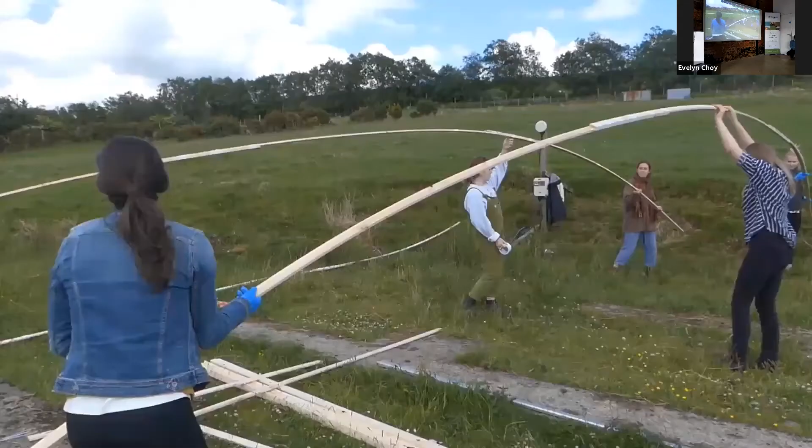Progress in construction is impeded by its insularity. Working with people who are different to us helps develop co-design skills and to communicate beyond the bubble of architecture.

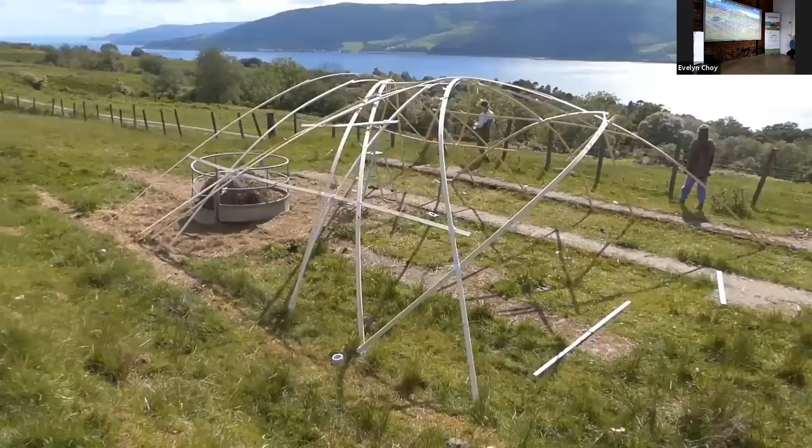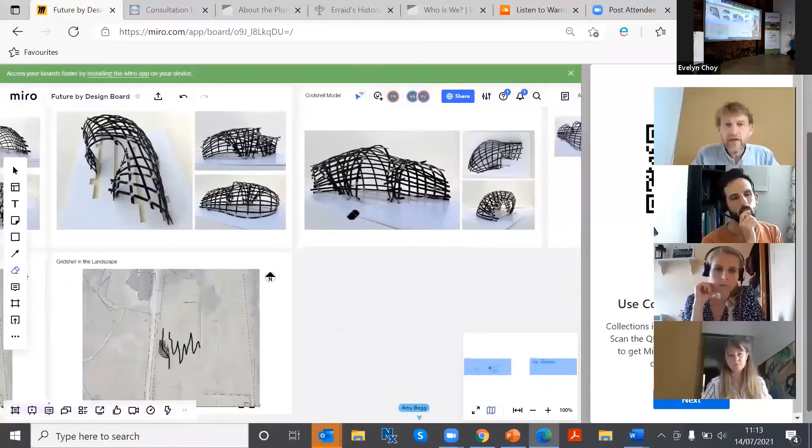So we brought together a diverse group of young creatives from 17 disciplines in 2 countries. In Scotland, students of architecture, product design engineering, jewellery, sculpture, photography, film and botany worked with early career architects, landscape architects and engineers.

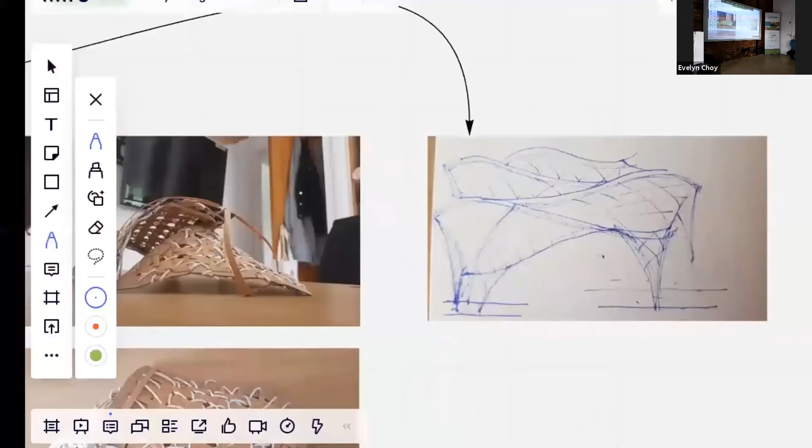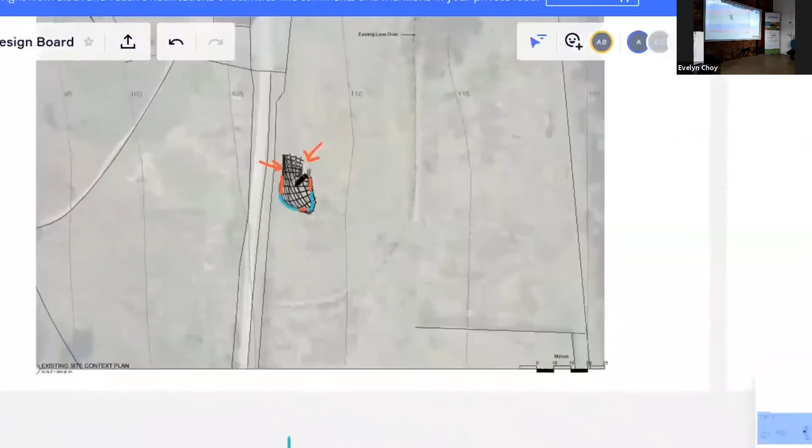Connecting the creativities of the hand and the brain proved a powerful design tool. I'm not from an architectural or an engineering background, I'm actually a jeweler and a silversmith. The move from object and handheld scale to the scale of somewhere you would step inside is a big jump, but the kind of interaction between a person and an object works in the same way, I guess.

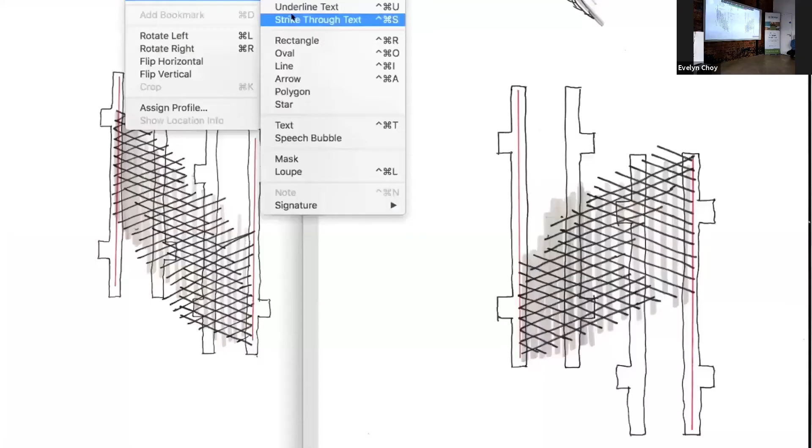The fundamental thing is, how do you make something work? The great joy of a project like this is its fundamental structural thinking. I think this idea of using a gridshell introduces a whole really interesting dynamic, because you can create structures that are unusual but at the same time will stand.

I actually had sheets of this very thin plywood, so I cut that into strips, and I was trying to look at the forms.

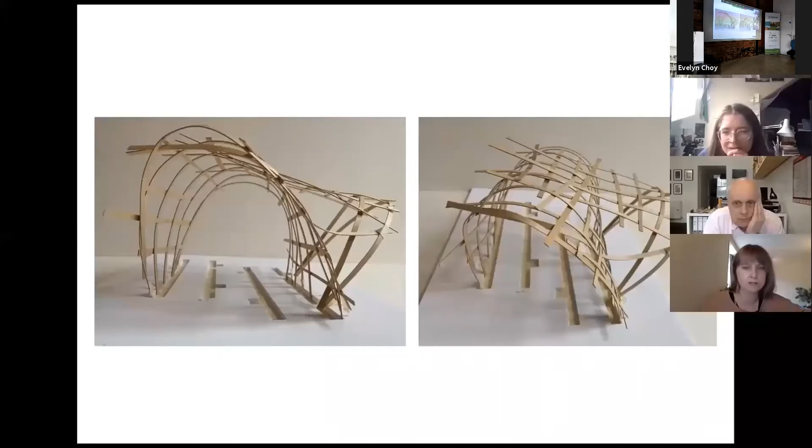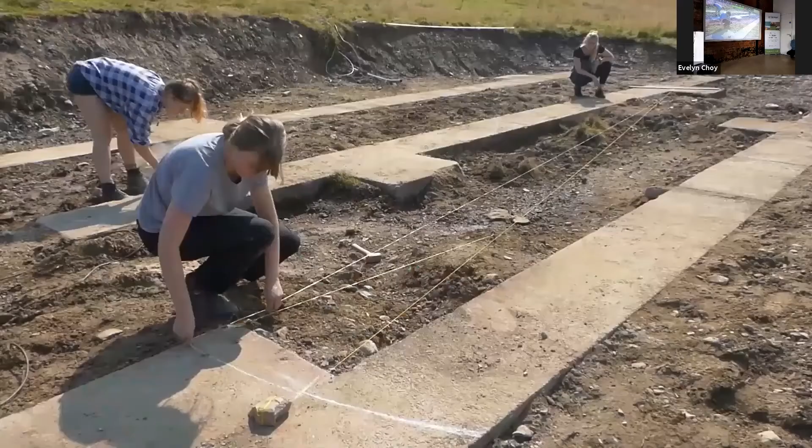We chose a brownfield site, reusing foundations from a previous building that stored about 14 tonnes of carbon. The challenge was to design a new structure within the constraints of 4 lines of concrete. The response: a 3D curvilinear lattice, the most different form imaginable. This avoided new concrete, a huge carbon source and the second most used substance by man after water.

8% of global carbon emissions come from cement, more than from aviation. If concrete was a country, it would be the 3rd biggest carbon emitter after China and the USA.

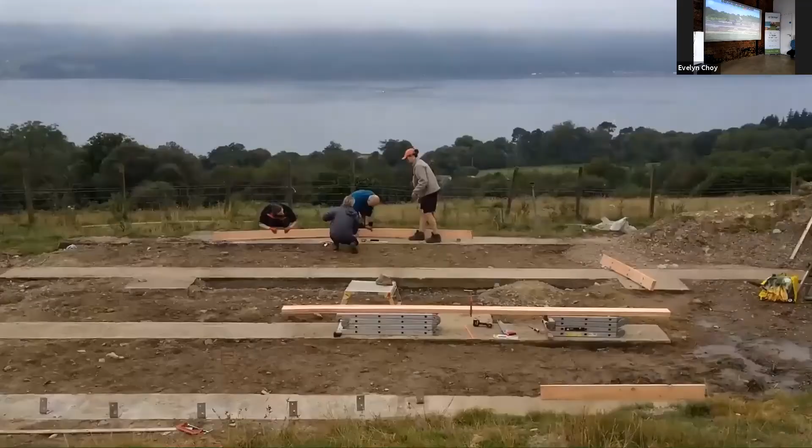As transport transitions away from petrol and electricity from coal, so construction will transition away from cement. Along with biocomposite alternatives, future designers will need the skill to reuse the carbon held in existing structures. One set of foundations may support many buildings over their lifetime.

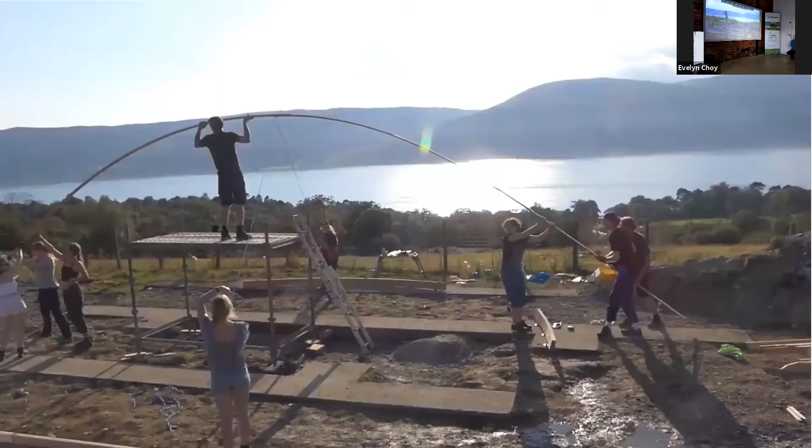Exploring low-carbon, non-toxic materials with transformative growth potential brought us to timber and mycelium. Larch was joined into 16-metre lengths, fixed with stainless steel cable ties and bolts.

Timber technology is really firing forward. You can make things that we couldn't do with bits of trees before, and that's completely fascinating.

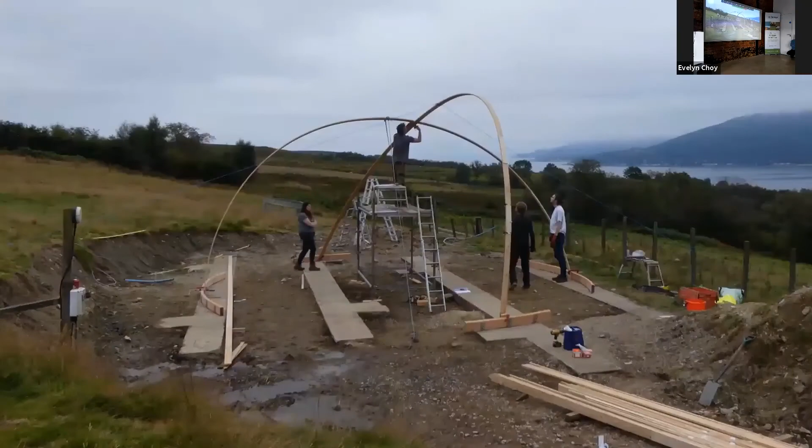Pushed to the limit of its strength and bendability, it wasn't clear whether the structure would work until the grid shell was actually constructed. If the timbers hadn't bent sufficiently, the group would have adapted the design on site to reflect the limitations of the material.

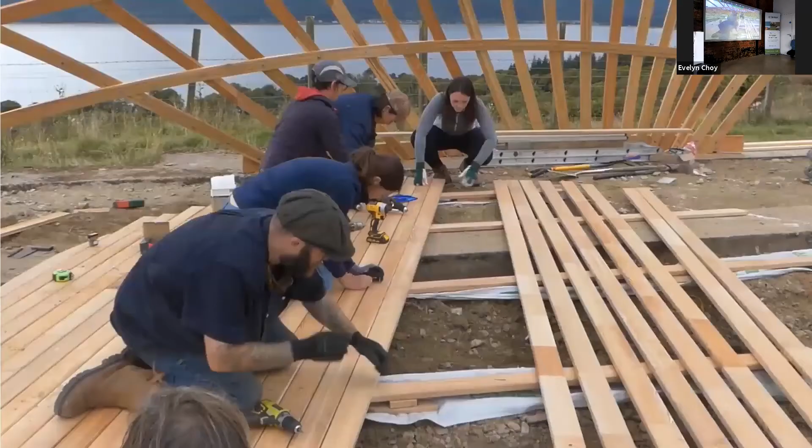This was an intentional design risk. Construction is dominated by accepted norms and low-risk approaches adopted for financial reasons, but which impede innovation and market development. To transform construction, we need to change our attitude to change. We need designers that will push materials and lead teams beyond their comfort zones.

For this project, it was important that we were daring. Not to have risked failure would have guaranteed that we didn't succeed.

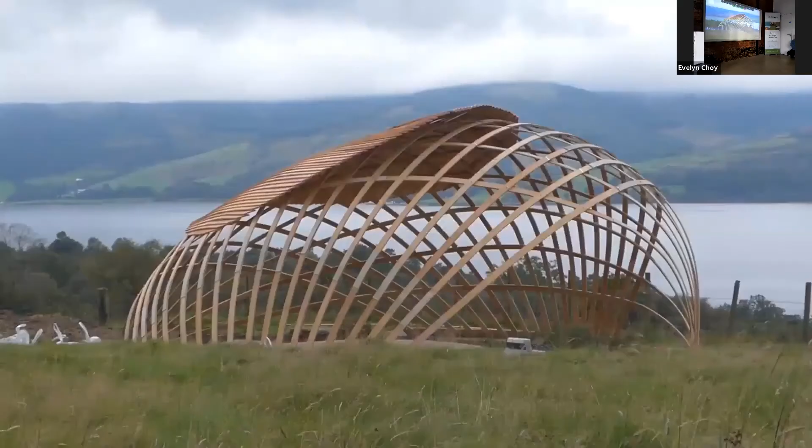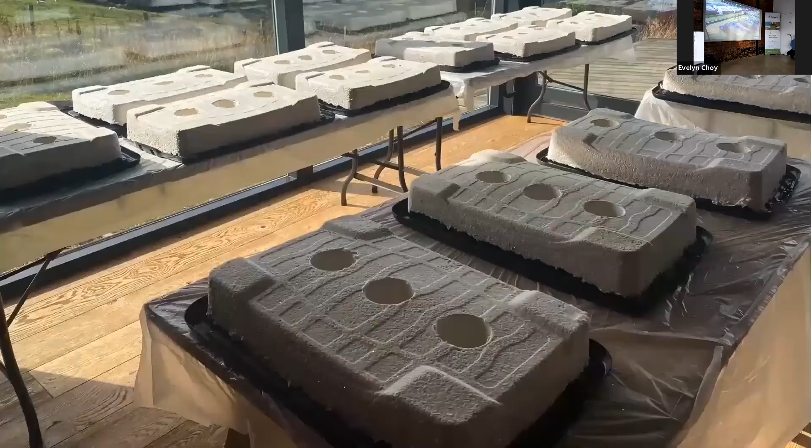The furniture created from mycelium and agro-waste in 5 days shows how we can grow our future buildings, displacing plastic and metal products. The group fused landscape and building architecture into one process of environmental design.

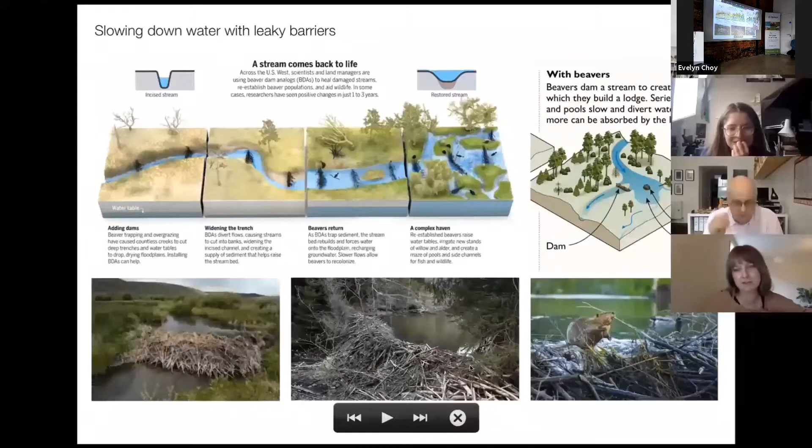I was interested in how these sorts of interventions, like beavers introduce, help change a landscape and maybe slow down water. We discovered that the post-farming landscape of the local area was part of the original Scottish rainforest, a rare temperate rainforest dominated by oak and hazel, rich in ferns, mosses and lichens.

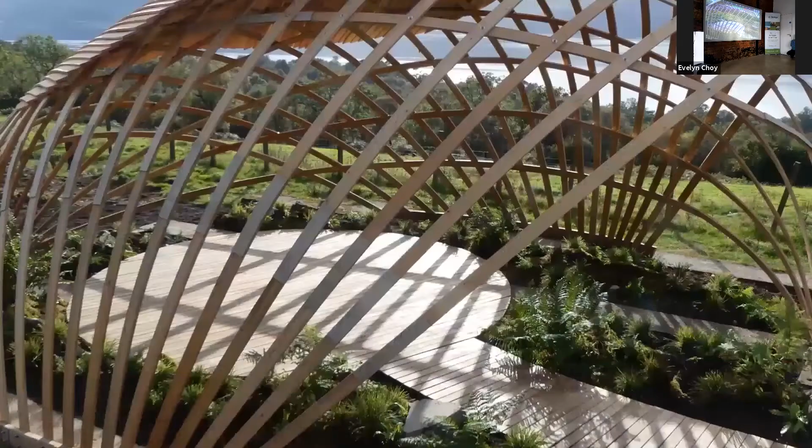Using a regenerative approach, the timber grid shell mimics rainforest conditions of shade and shelter, enabling pioneer rainforest plants to develop as an educational resource and a nursery to spread the habitat further afield.

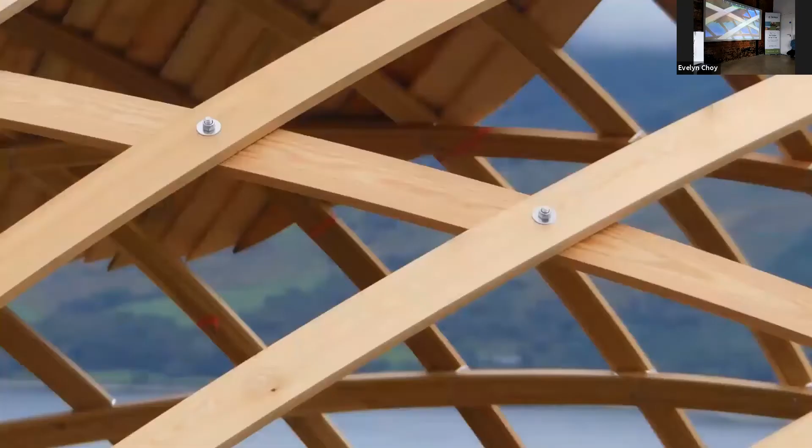By creating conditions that are good for forest plants, the design also makes a place for humans to thrive. Mimicking a forest clearing, the space slows people down, brings attention in close, moderates temperature, creates a more intimate acoustic, all reducing environmental stresses.

I quite like the idea that we can weave in elements of wildness and elements of rainforest. I've done some research looking at mosses and plants that absorb water. Historically, our landscapes tended to be much better at absorbing water because of the way they were managed, and it'd be really nice to look at some of these plants.

We talk about landscape and then we talk about mycelium and then it's kind of the grid shell, and obviously the success of this is all of it coming together, right?

The building is a temporary installation, but all buildings are temporary, though we rarely design with that in mind. Even the venue for COP26 is predicted to be below water soon.

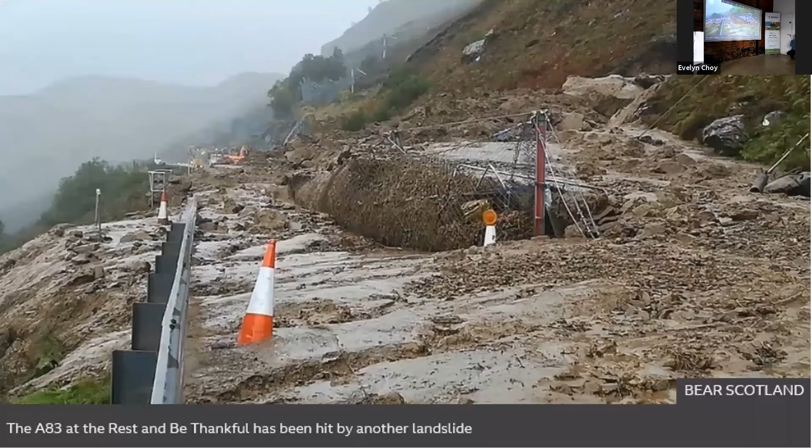As our fixed infrastructure, buildings and coastal settlements struggle with increasing rainfall and rising sea levels, we need a more flexible and adaptive architecture for the coming century. And in this, our grid shell echoes the architecture of the Scottish Travellers, long-time residents of Argyll.

Architecture is a creative industry whose mission is to build a better world, so it should be a leading voice in a progressive and just transition. But the tragedy at Grenfell revealed an industry dominated by short-term commercial interests rather than long-term social and environmental ones.

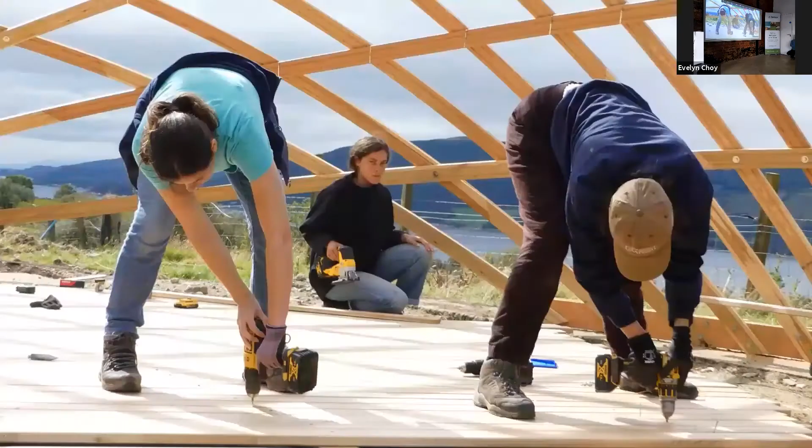This is in part because construction has an overwhelmingly patriarchal culture. It's the least gender-equal sector in the UK at 94% male, with 74% of architects men.

So it stood out that when we called for creatives interested in working together to tackle climate change, applications were dominated by women at 83%.

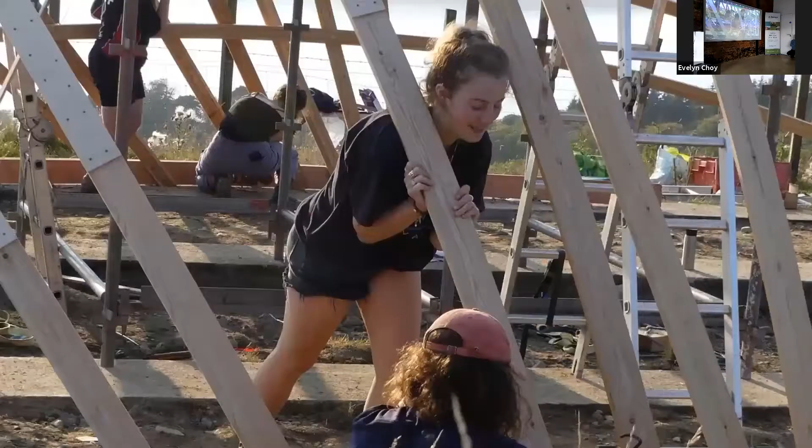Research shows that women tend to be better managers and team workers and bring more diverse life experience to design. But the key reason we need a change of leadership from men to women in construction is because women are less vested in the established culture that inhibits progressive change.

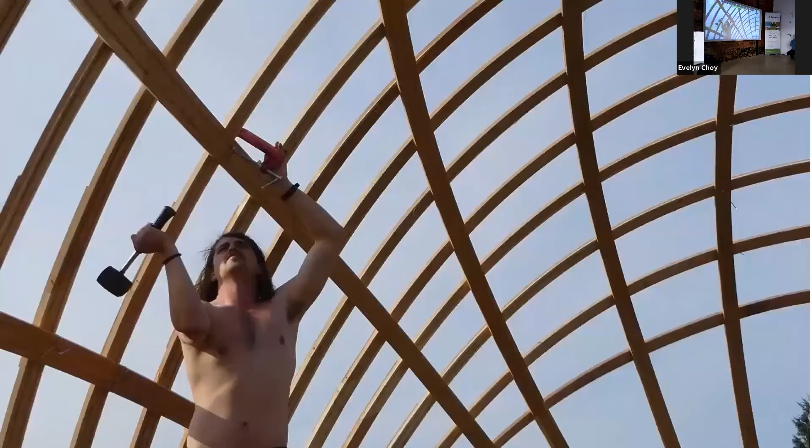We found a generation of talented professional women committed to change who now need pathways to power along with the 17% of men. If we are to transform our profession to be fit for the 21st century, there is no doubt the future is female.

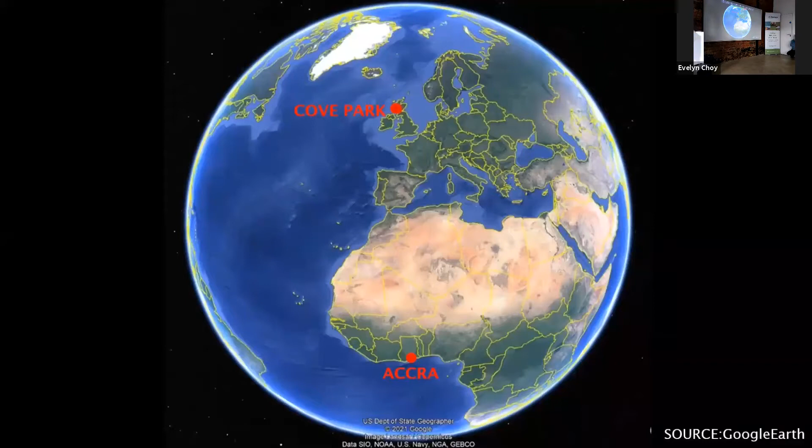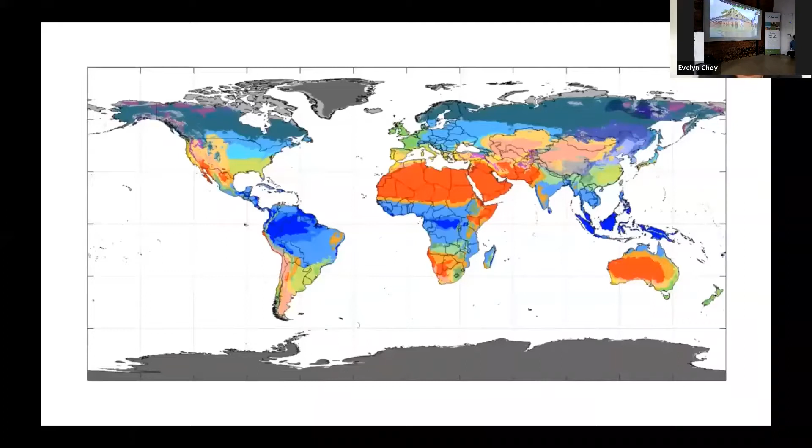Though challenged by COVID, the partnership with Ghana gave huge depth to our understanding of design for global climate change. While circumstances for the two countries were different, it became clear that the challenges of climate change and successful design strategies were the same. Both countries face a dangerous increase in rainfall linked to land use, and both solutions involve blended landscape building design and co-creation with communities.

It was also clear that climate change exacerbates historic inequalities. The UK has 0.8% of the world human population, but is responsible for 5% of total cumulative emissions. That's twice the population of Ghana, but 250 times its emissions.

Scotland and Ghana are both Atlantic countries, but Scotland faces 43 centimetres of sea rise by 2100, while Ghana faces 78. Ghana also has fewer financial and human resources to mitigate the effects of climate change, in part the legacy of empire.

The UK's wealth is the legacy of 250 years of coal, oil and gas emissions, the power and wealth that built an empire which grew by exploiting the natural and human resources of places like Ghana, whose resources were gold and slaves. By using a baseline for zero carbon strategies of 1990 level emissions, these historic global inequalities were perpetuated.

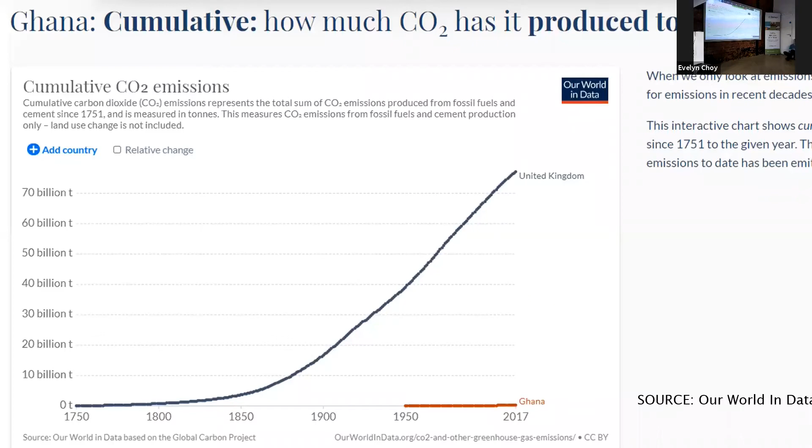That central learning space, I think that's really, really important. This engaging with the community and making sure that we're not just coming in as artists and saying, this is what we think we need here.

Children are involved in their future and organising it. We have the skeletal frame of what we're trying to do. Our group of young designers may be responsible for constructing a few hundred buildings between now and 2050.

Part of what we need to learn as designers and as a society is the skill of knowing how not to build, to live with less stuff, the art of living well by consuming less, so that there's more for others to share who have fewer resources.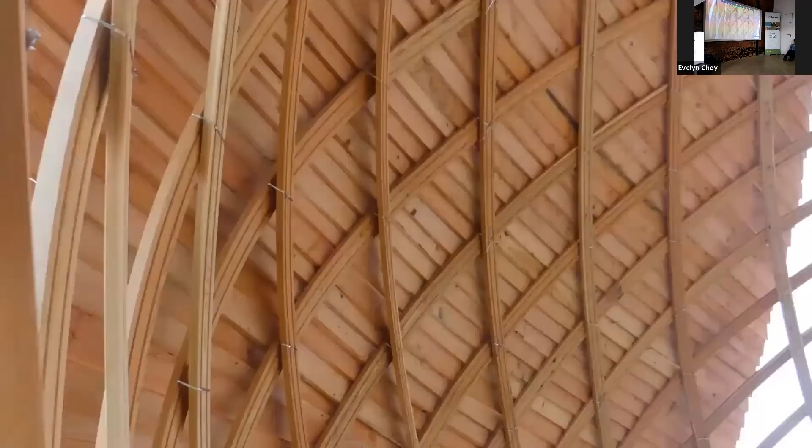By making a space for learning, we learn many things. We learned that by recognising our place in nature, we can rediscover what it is to be human. We learned how biomaterials can help us grow our way to a zero carbon future. We learned that diversity brings strength. We learned how trying to achieve something new comes with the risk of failure, but we must still take that risk. And we learned how designers across the world share a common challenge, one that can only be solved together.

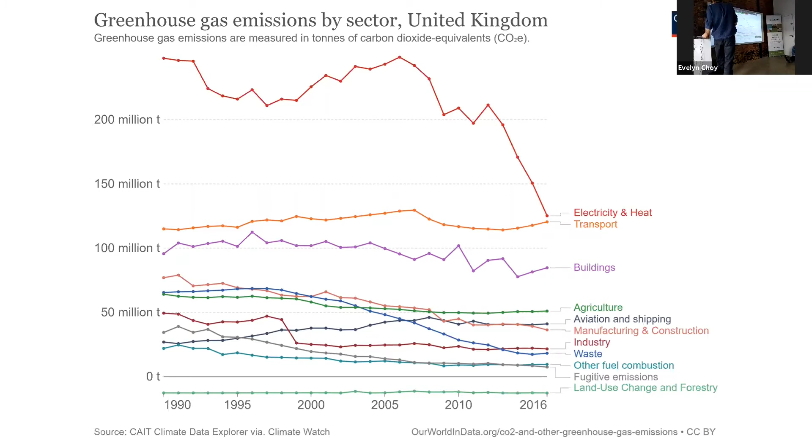So what does that mean for us as individuals, as designers, as a sector? How can we influence that process of change so our industry damages the planet less, and that we transition in a more effective manner? So I'm just going to look at one example of a material, concrete.

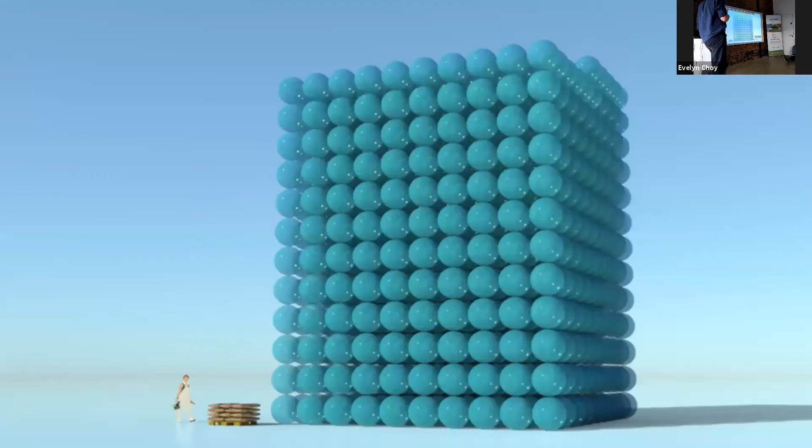About 8% of global CO2 emissions come from cement. Within Scotland, the Dunbar Cement Works is our 3rd largest single source of carbon emissions after the petrochemical works at Grangemouth and Mossmorran. And individually, that's how much cement we individually consume each year, and that's how much CO2 comes out of that.

So it's a pretty big problem, and it's going to become a bigger problem as other sources of carbon emissions are reduced. So what's our plan in our sector to cut embodied carbon? Basically, we don't have a plan. I'm sorry to say. And that's the problem, because a lot of other sectors do have a plan and our sector doesn't.

But if we did have a plan, what would it look like? It's really not rocket science. It would look like the plans for other sectors. We would reduce demand, build less buildings, reuse buildings more, have leaner construction, and we would do that using the tools of regulation and public procurement strategies. We would use alternative materials which are less damaging, materials that are grown rather than extracted and produced, so timber, mycelium, clay. The answers are pretty simple. We know they're there. We just need to get on and do it.

So how is it all going to pan out? I think the reality is we're way behind other sectors in this process of transition. What that means is we're going to become more and more exposed to a process of change and less able to control that. Because at the moment, the government sees construction as a route to power the economy, so it's a vehicle for wealth and for jobs, not really a vehicle for transitioning to a low carbon society.

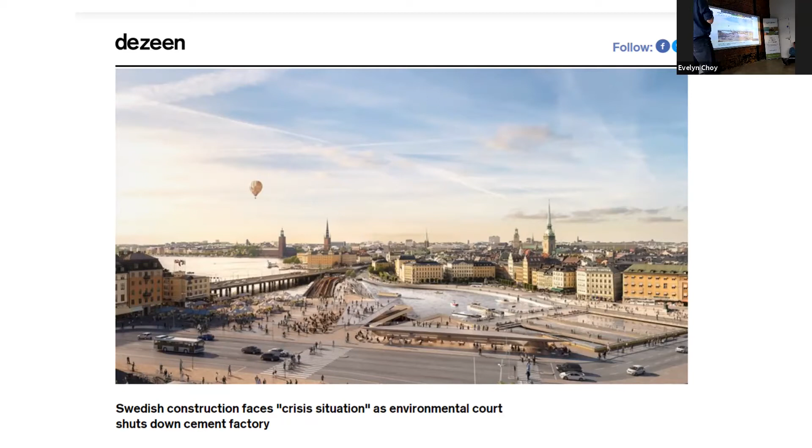I think you can see that the influences on the construction industry may come from other legal routes rather than necessarily directly in terms of carbon emissions. It might be a more effective strategy for change.

And of course, we know all the alternatives are out there, they are being developed, but the amount of resources that are being put into research and development for biocomposite alternatives is just minuscule compared to other sectors' transition programs.

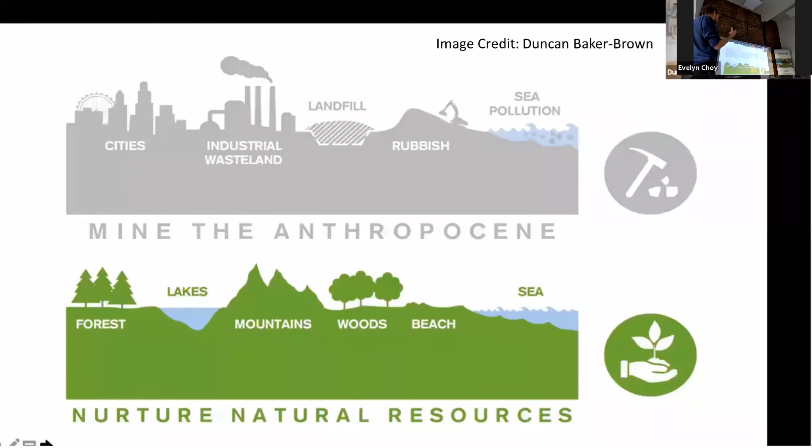So what we need is a just transformation to net zero carbon and net zero resource construction sector. We need to change the whole system of how we build things. It's not just about carbon. If we built a passive house for everyone in Scotland, we'd have net zero carbon in use. Great, but by the time they got to switch on their non-existent heating system, we'd have destroyed the planet in making those homes. So the whole process by which we create and manage the built realm needs to fundamentally change, and that's at the root of the word transformation. It's not a transition; it's really a transformation we need, so that we, as architects, engineers, and surveyors, can make our home on this planet without destroying it in the process.

So what can I do? And when I say I, I mean us individually and collectively, because collective action here, I think, is really the key if we want to change the system. So we have to change the culture.

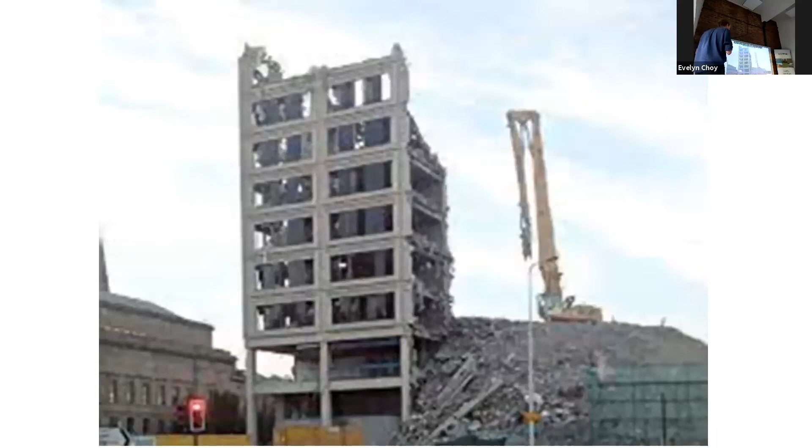We have to stop giving prizes to big lumps of concrete and saying this is the thing we aspire to, especially when they're made on a big lump of demolished concrete from the building that was previously on the site and which only lasted one generation. This is not our vision for the future of architecture.

And we need our organizations in the industry to stand up and take leadership - RIAS and RIBA. If the National Farmers Union can say, actually, we need to have fewer cows, then why can't RIAS and RIBA say, actually, we need to have fewer buildings and they just need to be better buildings? The time really - I don't understand why we're not saying these things.

We just individually, we need to reduce demand and use bio-alternatives. You need to stop specifying and using concrete. It's really that simple. And yes, it's challenging and it's difficult, but by doing that, you will develop the skills and ability that we need in the future for our industry.

Because our industry - we call it the construction industry, but really the reality is that we should call it the destruction industry, because that's the effect we're having on the planet. And as individuals and as professions, we're culpable in the destruction of the planet that we're making our home. And often, we earn money and get turnover by producing stuff for the relatively wealthy part of the world, but it's at the expense of future generations and of the less wealthy parts.

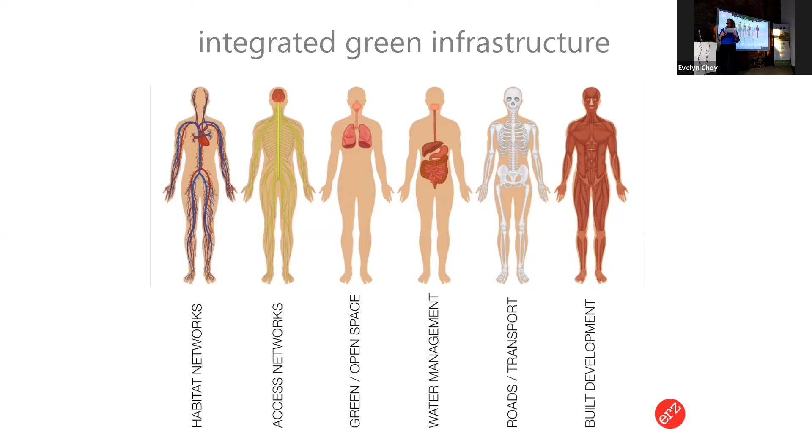So integrated green infrastructure looks at habitat networks, it looks at access networks, it looks at green and open space, it looks at water management, which in Scotland is a huge issue, roads and transport and how we move about, and built development. And what you can see is that the construction industry is probably primarily concerned with roads, transport and built development.

In fact, that's not that big part of the whole system.

If you were to use the analogy of surgery, and you were a surgeon and you were going to perform heart surgery, or let's use the skeleton analogy. So roads and transport, you're going to do major surgery on part of your skeleton. You wouldn't, no surgeon would do that without looking at whether your heart's working or your lungs are working or your veins are working, because the surgery would fail. And in fact, that's what we're doing over and over again. We're performing surgery by building buildings without taking into consideration the bigger systems.

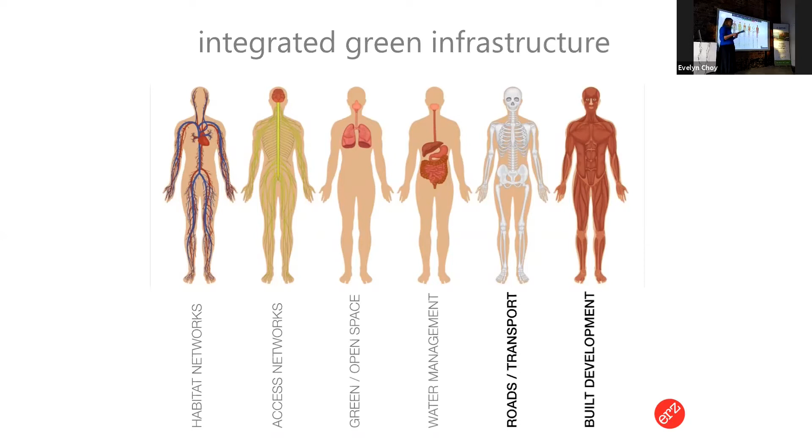So this is a horrible slide that I've nicked from a different presentation, but it does sort of explain it.

It's a bit cluttered. You can tell I like empty slides.

This layer cake approach to site analysis is something we use quite a lot, and it goes back to Ian McHarg, a Glaswegian landscape architect in the 20th century who was massively influential in looking at landscape analysis and the relationship between design and nature. By putting these layers in place, we're able to analyze the different systems and look at how they interact with each other.

This is a sort of site analysis we always do. We look at water, hydrology, topography, green networks, habitat, and we use all of those tools to create places which are landscapes in which buildings may or may not sit.

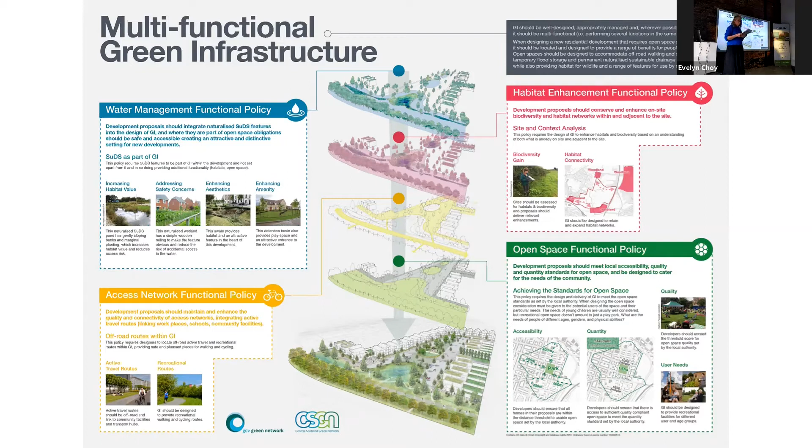So let's turn the question on its head. This is a diagrammatic place where you've got active travel networks, footpaths, links beyond into the wider city. You've got water flowing through not only the landscape but through the buildings, through green roofs, through rainwater harvesting. You've got green habitat networks coming through the buildings, through the green roofs, maybe through green walls and courtyards. You've got permeable paving outside the buildings that lets the water go back into the land instead of being taken into sewage systems. You start to create places that are part of the bigger, wider landscape networks, instead of places that stop those processes and networks in their tracks and create barriers and blockages.

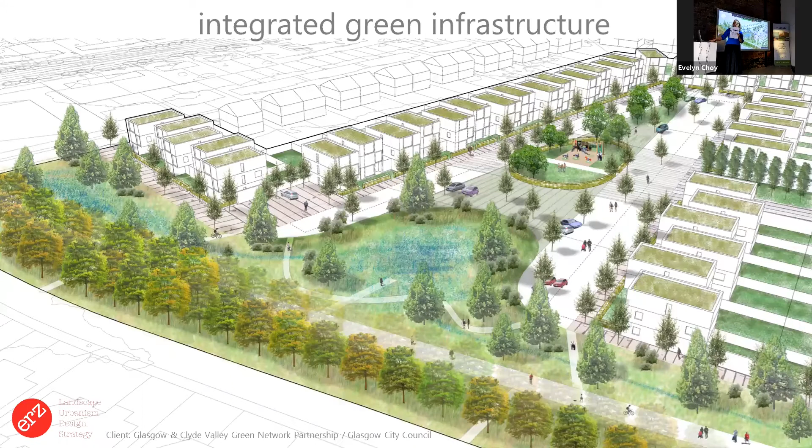So the question becomes: how can buildings support landscape? And that's what I think the sea change needs to be if we're going to realign the Scottish construction industry towards decarbonisation. You've got to change the starting point and look at landscape as the root of all of it.

I'm just going to show you a few projects from the office which are in different stages of work. At the moment, my colleague Rolf, who's the other director in the company, is working with Maryhill Housing Association in Maryhill North. This is a completely different type of master plan because it starts with the landscape, and the buildings will come later.

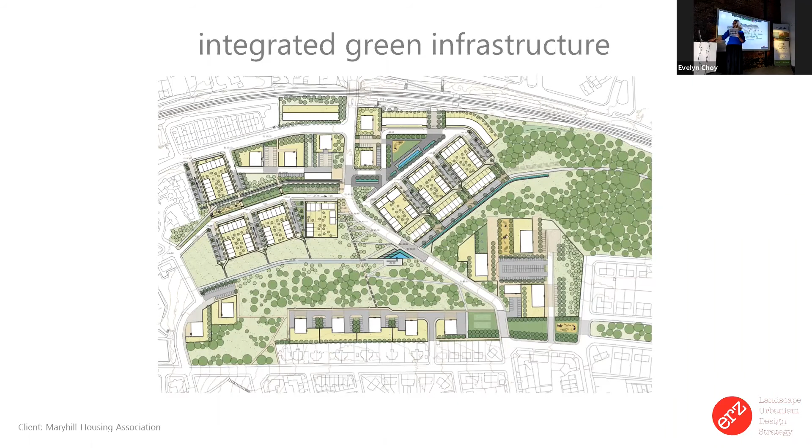So we're developing a master plan at quite a large scale, which puts in place habitat networks, forest cover, and productive woodlands. It starts by looking at the natural topography and geomorphology of the place. It then manipulates water, using the existing hydrology to create natural drainage through the site. It looks at active travel and how it connects to existing routes, movements, train lines and footpaths. All the buildings are ghosted in, but they're ghosted in to determine that they'll have good microclimate, that everybody's got some south-facing light.

So the buildings come last and not first. This is a landscape-led design process, and I think the places that result from this, where people live, will also be much better for people, as well as better for the landscape — it's a rejuvenation project as well. A lot of this is empty, derelict and vacant land.

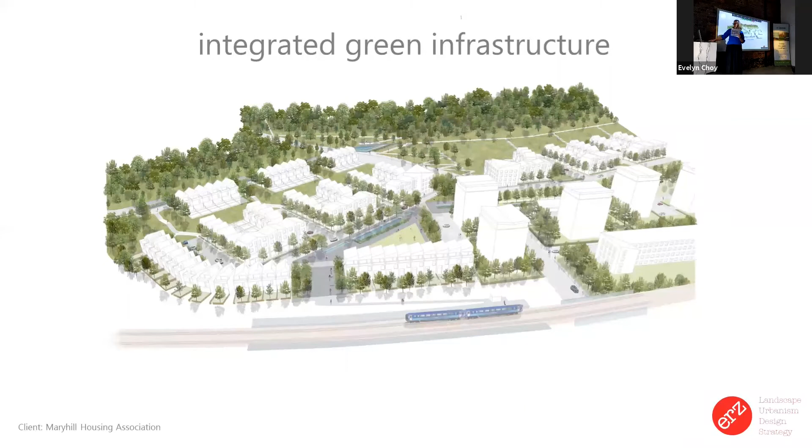So on that note, extra slide, the visualization there. The buildings are just ghosts. They will come in to support this landscape later, when that aspect of the development starts, and all of this will be put in place first.

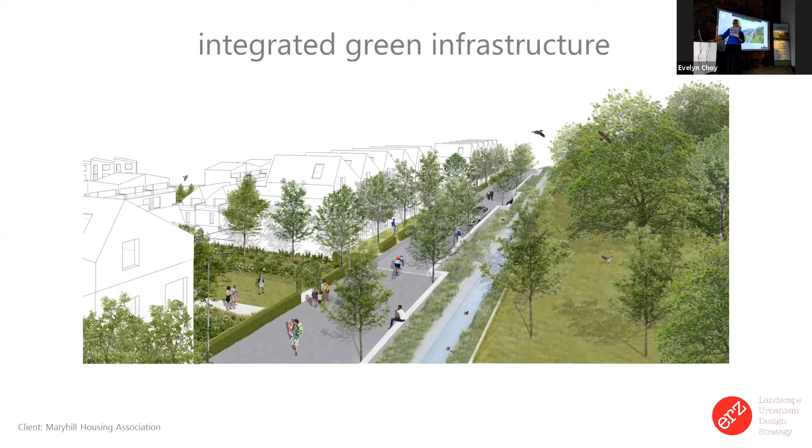Coming back to Celtic Park — can this landscape-led process be used as a kind of cure for the malaise we were talking about earlier? Yes, it can. In this part of the city, in the East End, we were commissioned quite a long time ago, in 2013, as part of the Commonwealth Games legacy projects, to look at an integrated green infrastructure strategy for that part of town. As part of that bigger network strategy, we identified a series of sites for development, and one of them was this abandoned bus park outside Celtic Park, which was highly contaminated and not really used for anything.

Camlachie Park, the result of the first phase of implementation of the Green Network Strategy, is an ecological park. It deals with contamination of the land, it deals with problems with localized flooding and water management, and it brings in a whole lot of native plants and tree cover. Perhaps most importantly from a human perspective, it's got facilities for people who were living in extremely isolated circumstances — in terms of climate equity, social equity or health equity, the people living in and around that bus park were extremely limited in what they were able to access.

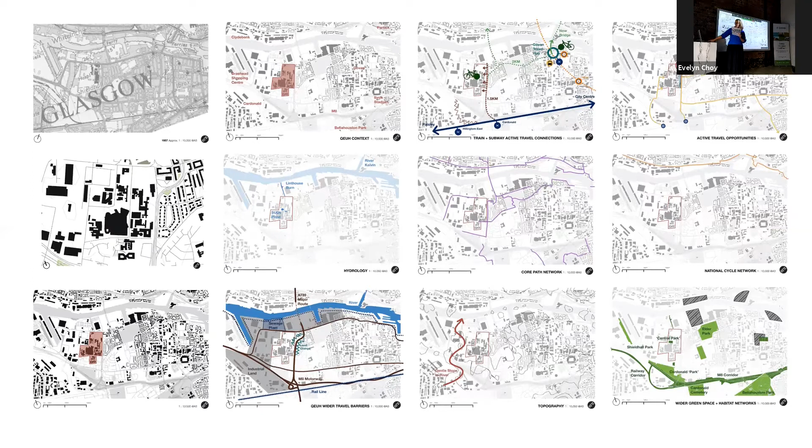So we've been working with the sustainability team for Greater Glasgow and Clyde, doing enormous amounts of layered analysis, trying to work out how the landscape worked before, how we can use those systems to mitigate what's been built, and how we can add things to make these buildings work much harder in terms of serving the landscape. We've done that at a range of scales, from citywide to local round Govan to down onto the campus itself.

The overall concept now is looking at the campus as a landscape system, structured around water. There's a SuDS tank in the middle of the hospital at the moment, which is literally a hole in front of the main doorway—opening that up into a park. That enables us to put green drainage into the car parks, and the car parks will become filtration systems for all the groundwater.

We'll be taking water off the buildings. We're going to plant wet woodlands all the way through the car parks to deal with the runoff from the car parks and the oil going into the ground. All of this hopefully will greatly influence the plans for new buildings at the hospital, of which there are plans for many, by demonstrating the power of the outside as well as the healing environment.

Because if we get people outside, the statistical evidence for the speed at which people heal is remarkable. So even if you can see a tree outside your window, you get better more quickly. These things seem small, but they're big, powerful tools for change. If you can demonstrate that, you're saving the health service millions of pounds, and then they start to listen to you.

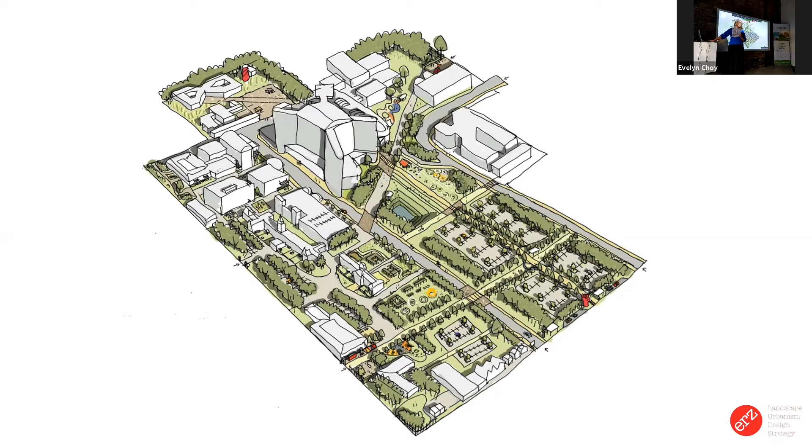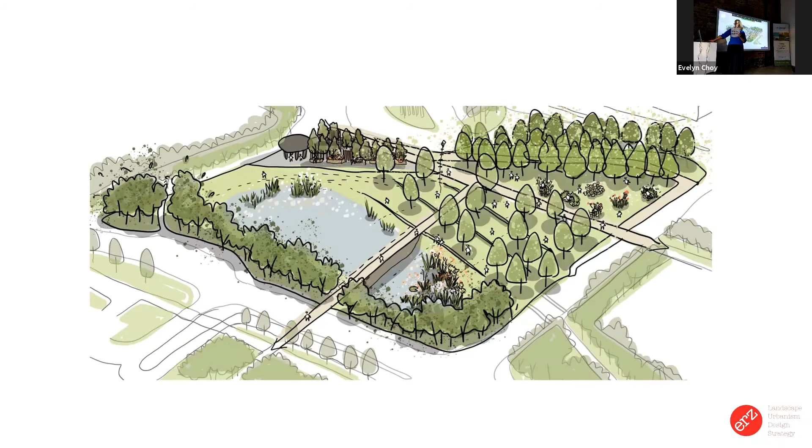So the SuDS pond, which is a big engineered tank, becomes a park. I'm just working on designing this up at the moment, with no concrete, because we're as guilty of that as the architects—we've been using concrete for years.

So how do we realign the construction industry to be able to deliver low carbon buildings? Everything that he said, plus we need to be looking at the much bigger context of the landscapes in which we live. In order to do that, we're looking at being a positive continuum—even the smallest building, but especially large groups of buildings, should be a positive continuum within the surrounding systems. You need to link to services, active travel, other buildings and destinations. You need to be looking at the water, the ground, the soil, the ecology, the microclimate, the biodiversity, and also people and healthy lives, getting people outside and aiding conviviality.

And that's a really big thing. So this is what I think: you've got to remove all the red lines around planning applications and around site analysis. You've got to be looking much more widely when you plan buildings. And this is the landscape-led approach. We also need to remove all red lines between professions.

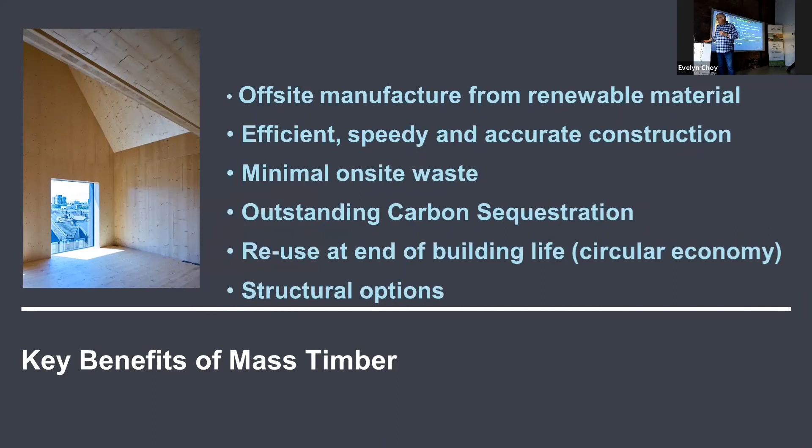And there are lots of benefits of mass timber. I don't want to give you a lecture about that, because that's a whole course we run, and it takes quite a long time to talk about all the different parts of it. But you can see them all there - ping, ping, ping - lots of interesting issues there. And there's even more things, even more points. In fact, I've got a list of about 50 points about why this is a good way forward, but that's probably going to turn into a book rather than a few slides.

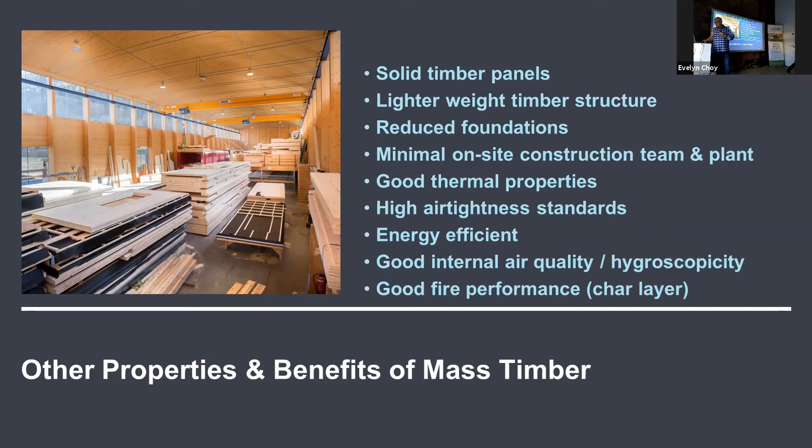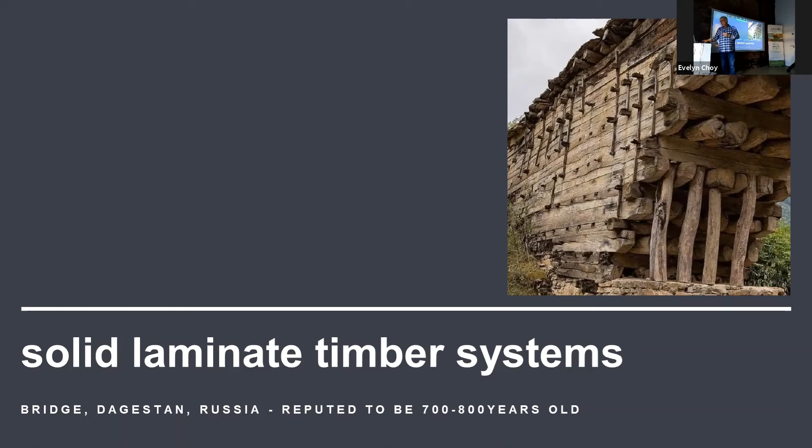So that's really part of what I'm looking at in terms of decarbonisation. So, those of you who have heard of CLT, anybody? Mostly? When was it first used in the UK? 1998, 99 - this is Shrewsbury Music School.

And we've been using this for more than 20 years. I get phone calls regularly saying, well, this material is kind of risky. And you think, we've been using it for over 20 years - there are about 1,500 CLT buildings in this country. And I still get those questions, phone calls all the time from engineers, worse QSs, and a lot of architects who, to be fair, think it's like building a big cardboard building. And it's not, right? It's actually quite a lot to it.

However, there's when it first started. If we didn't have this Zoom thing at the top, you'd see it says 1923 patent for cross-laminated timber in the United States, right?

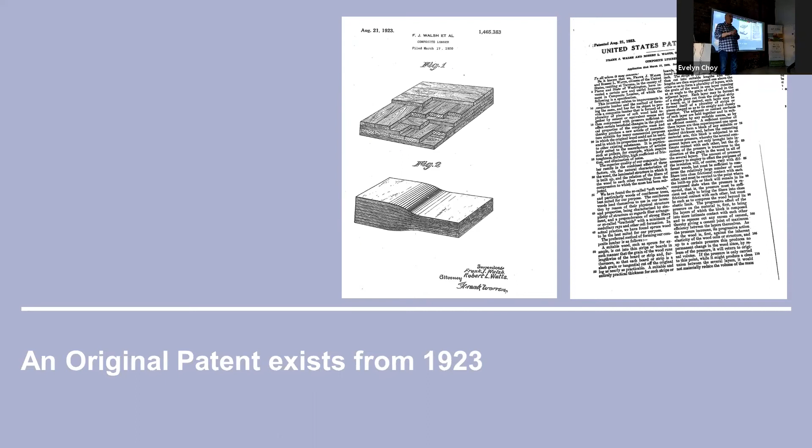So things that we all think are new aren't that new, right? And they're not that complicated either, because that could be as easily non-glued as glued. A lot of the work I've been doing for some time has been about dowel-laminated systems, so that we can actually put things together, cross-laminated systems without glue, because then we can do things more locally around the country, with local forests, local manufacture, and get out of the whole embodied carbon issue in a big way.

And partly it's because Central Europe, Austria, Switzerland, Germany, have massive amounts of forest land cover, right? So Austria particularly, all the big manufacturers are there. But they don't get all the timber from Austria. They can bring it in from countries nearby, Romania, and so on, other places where there's really poor communities with poor infrastructure. They sell their timber cheap to Austria, and they turn it into big panels and sell it to us for lots of money.

So there's a need to look at how do we do this on a much wider basis than just looking at ourselves. It's really about how do we think differently about the forest resources we have? How do we use them better? How do we move them and use them more in an environmentally friendly way?

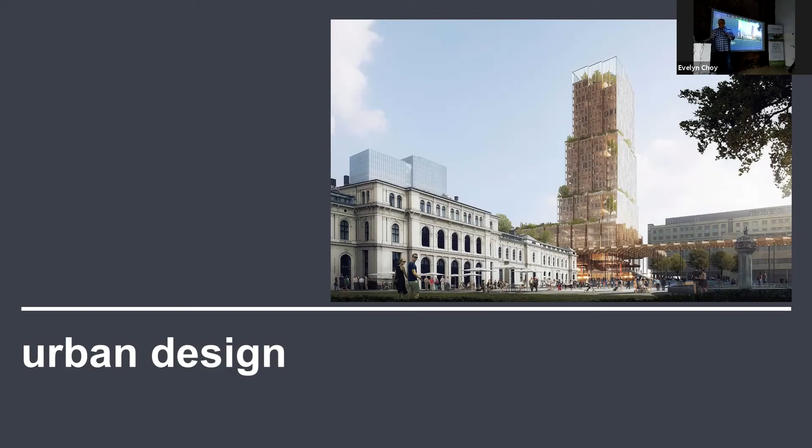And the other thing that we don't do in this country is we don't teach in our schools of architecture and engineering anything about wood, right? We don't do it. We talk about it, and if we're going to decarbonize, we need to do more than talk about it. We need to make it happen. So a lot of what I do is filling a gap because the universities don't do it, and the engineering schools definitely don't do it. They don't want to do it because they're all trained in steel and concrete. That's what they know - these are predictable things. Timber's not so predictable, and every tree is different, et cetera, et cetera.

This is kind of research.